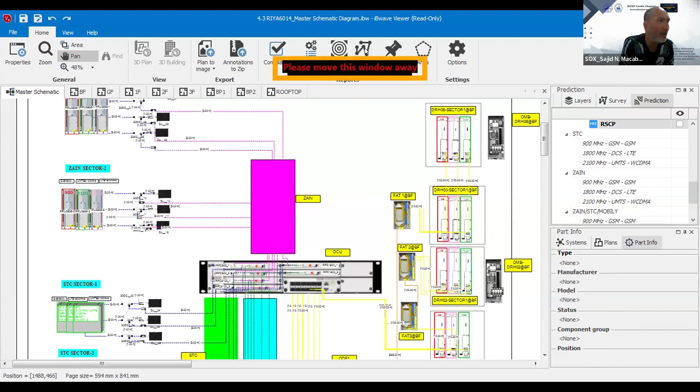Mamaya na po, may nag-message sa akin, ICEP, ESC, si Sofia. Mamaya na lang yung question ha. Kita po sir yung share screen. Okay, thank you.

So now, ito yung sinasabi ko na master schematic. So these components nasa loob ng equipment room, most especially nasa rack, yung pinakita ko kahapon. So what I'm telling about the rack, nandito yung BBU, yung baseband unit, yung DCU, okay? Yung ibang components like the FAT.

Okay, so let me zoom a bit. Yung FAT, yung ODB, sorry, OMB, yung ODF, okay, yung optical distribution frame. So yan yung ginawa ko na design noon.

And etong dito kasi, ito yung kumbaga yung lead operator ito. Tapos yung iba, ito yung mga dummy load, kasi dito din mag-connect if ever na merong shared site yung sinasabi ko, pero hindi siya neutral hosting. Neutral hosting, meron nang naka-ready na another system integrator, naglagay sila ng neutral hosting pero wala pang operator sumaksak.

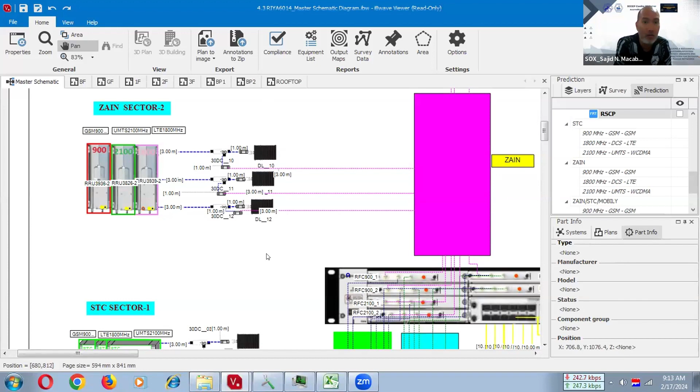Kaya nga neutral, pero etong shared site is similar to neutral hosting. Ang problema lang, yung lead operator, yung discuss ko last Saturday, yung naunang operator, siya naglagay ng infrastructure. Yung second at saka third, sasakay na lang sa system. Yun yung, kaya may dummy load dito.

Then siyempre, ito yung sinasabi ko nga na sa master schematic. This design is very required. Lahat ng i-discuss ko, required ito na document. So sa mga may alam ng IB Wave, you are very lucky. Sa mga wala pang alam kung anong IB Wave, ito yung itsura ng IB Wave. Okay, so ito, yan. Yung mga yellow, it corresponds to the fiber optic cable.

Yung diniscuss ko last Saturday, yung mga pigtails, yung mga ready-made na patch cords, depending on how much the distance, depende yan because part sa survey yan, dito ilalagay, tapos yung susunod na connection, yung DRH at saka RRU. Sir, saan yung RRU? So yung DRH or RRU, ito yun.

So ibig sabihin, dadaan mo na sila lahat sa optical distribution frame because the connector is this connector going to the other end of the fiber optic patch cord, it's another connector. So madalas ginagamit namin dito, gumagamit kami ng STP, gumagamit kami ng FC type connector, and the other end would be the LC type connector. So kailangan ng ODF para may interface.

So from ODF naman, going to the DRH, dadaan mo na siya sa FAT or yung fiber access terminal kasi iba na naman yung connector. Ganun talaga yun, mix and match talaga. Hindi naman pwede universal lahat, all the way pare-parehas ng connector. It's a business talaga, so ibang vendor or telecommunications hardware or equipment manufacturer, iba yung connector. So walang problema, nandiyan naman yung mga connectors diyan, mga standard connectors na basta mag-fit. So yun yung gagamitin nyo.

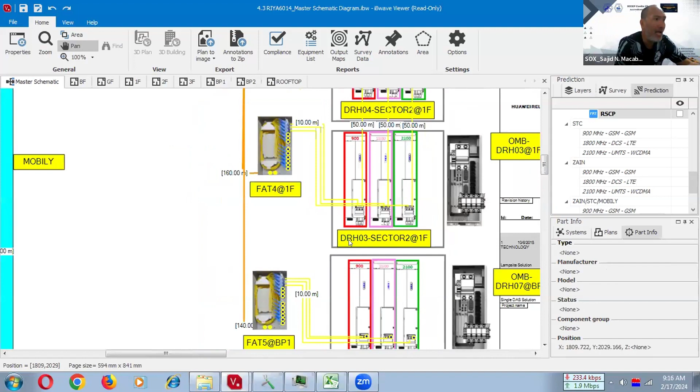Now sir, dahil itong DRH is part of the active part or yung master, kaya naman mag-umpisa yung passive na part. So mag-umpisa yung passive na part, either DRH na or RRU, yung remote radio unit, yung sinabi ko last time. Okay, so ito yun. Ito yung ano naman, yung sa passive na part, which is yung DAS schematic.

Okay, halimbawa ito, DRH siya. So ibig sabihin, hindi dito sa design na project na ako yung nag-design, DRH going to the distribution na. Distribution, ibig sabihin, nakikita nyo ito? Nakikita nyo guys, ito mga antena to.

May mga antenna, yung high gain antenna, meron normal na omnidirectional, meron panel. So eto 'yon. Sabihin natin papasok na tayo sa passive. So ito na 'yon sa passive na part, sa DAS schematic, sa distribution.

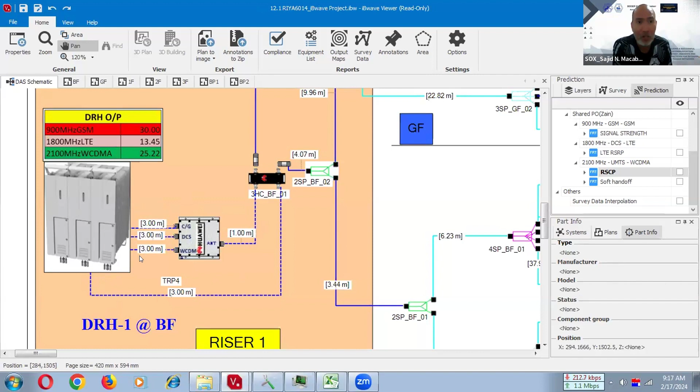So DRH, siyempre, diniscuss natin sa Philippine Electronics Code sa Module 1. Ano to? This is the triplexer, tatlong technologies. Tapos, siyempre, question, kung ito yung triplexer, which is tatlo, 2G, 3G, 4G, bakit meron isang kable dito? Itong isang kable kasi, this is another connection pag meron tayong ginagamit na MIMO antenna.

Kasi di ba pinakita ko sa Module 1, nasa loob ng Philippine Electronics Code Book 4 natin, pag gagamit tayo ng MIMO antenna, there will be a second input. Kaya nga dalawa yung jumper cable ng MIMO antenna. So yung pangalawang jumper cable, yung pangalawang port, galing dito. Itong tinuturo ko ngayon, galing dito para i-connect na yung second port ng MIMO kasi meron tayong nilagay na MIMO antenna as per our design. O ikaw yung designer, so syempre, second cable for the second port sa mga MIMO antennas somewhere sa design natin, somewhere in the building or somewhere in the floor.

So ito yon. Then dadaan siya sa yung pinakita ko sa Module 1 na yung 2x2, 2 input, 2 output na hybrid combiner. Hybrid combiner, ibig sabihin, meron siyang gain para makompensate yung mga losses. So ang daming losses, ipapakita ko sa inyo kung anong klaseng loss yan.

May table generated from the software. Nilagay ko na sa Excel para hindi mabigat mag-load kasi mabigat ang kinakain yung memory nitong software na ito. So para makompensate, itong combiner, itong triplexer, may mga gain yan. Nasa specs na yan, nasa technical specifications na yan, para makompensate yung ibang mga losses.

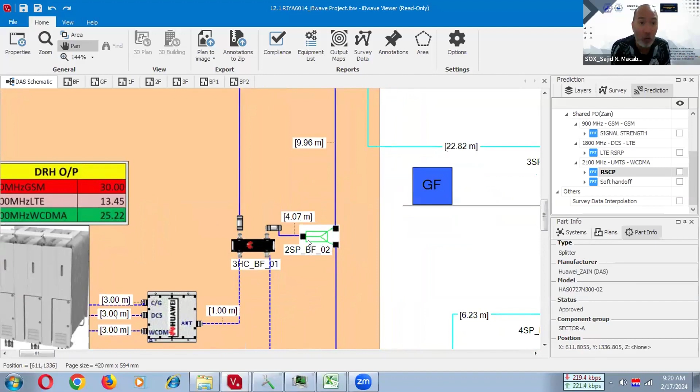Okay. So now, sir, ipakita mo nga sir yung design mo sir para magkaroon kami ng idea kung ano yung diskarte mo. By the way guys, sa design walang mali, walang tama. Pero ang comment sa iyo yung consultant. Wala kang magawa. Kahit na magaling ka, kahit na mas magaling ka sa consultant, masusunod pa rin ang consultant pag meron siya nakitang something wrong, or tutulungan ka naman. Okay? Because this is a team collaboration.

So, for example, sa basement floor, meron akong dinesign kasi sa basement floor, may mga offices doon, mga security, dito sa itong dinesign ko na specific na project. So, yun, nakita ko, may mga rooms, may mga CCTV room, security guard, may mezzanine sila doon. So nag-design ako, gamit ako ng two-way splitter, tapos distribute ko, nagamit ako ng four-way splitter, gumamit ako ng 3SP, and then ito yung mga number of antennas, lahat omnidirectional, SISO, hindi ito MIMO, na makaka-cover niya lahat ng basement floor.

Sir, paano namin malaman itong mga antena saan mo nilagay sa floor plan? Ipapakita ko ngayon. So ganito yung diskarte sa pag-design.

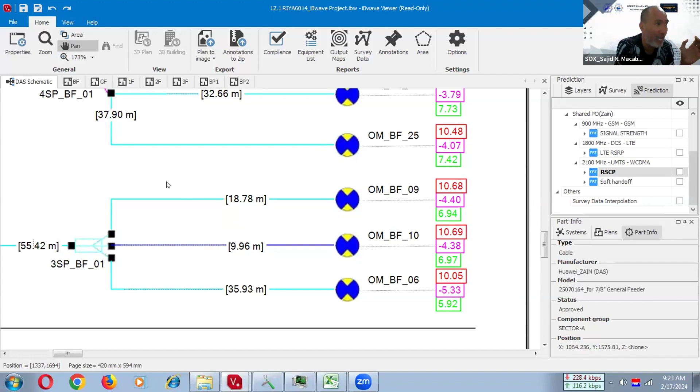kopya nung telecom operator namin, ito yung template, ito yung standard nila, sundin natin. Pag meron isa dyan, halimbawa yung tatlong values, yung dalawa okay, yung isa bagsak, you need to check the configuration of the hardware, baka mali lang yung pag-configure mo. Sir, anong configuration yun? Minsan, i-check mo yung configuration ng DRH. Pag wala dito yung problema, balik ka sa mga kable. Yan yung best practice. I-check mo yung jumper cable, baka faulty, or baka yung antenna faulty. I-replace mo yan, ipa-replace mo yan. Halimbawa, ikaw yung site engineer, i-replace mo yan.

Kasi gusto ng design engineer na yung values na lalabas dyan, almost similar. Okay, by the way guys, yung design at saka yung implementation, it will never be 100% the same. Pero all changes yan.

Kaya nga yung design engineer, pag nag-uumpisa na sila mag-install, dapat ang site engineer kukuha ng kopya ng design doon sa design engineer talaga. Kasi yun yung reference niya eh. Ano ba yung dadalhin ni site engineer? Syempre, yung design, approved design na ginawa ninyo in the software. So, ito mga best practice.

Okay? Pag wala namang problema dito sa passive na side, ang problema, i-check nyo sa susunod, yung mga fiber optic connections dito, baka may problema sa splicing nyo or baka merong factory defect yung mga pigtails, yung mga patch cords na ginamit niyo from DRH to FAT, FAT to ODF, ODF to OMB, ODF to DCU. Yun, i-check nyo yan, paatras, kumbaga.

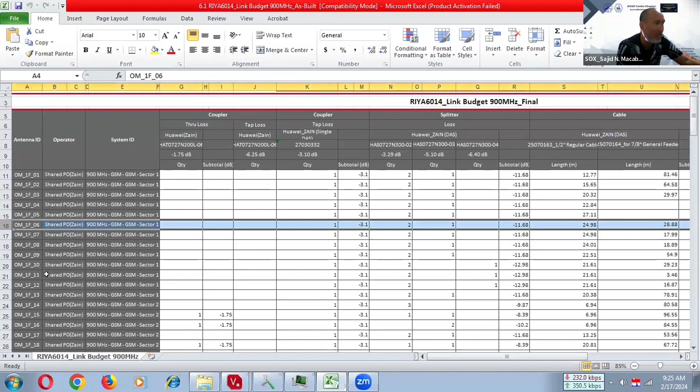So, yan yung parang, now, sir, may sinabi ka, saan yung link budget sinasabi ko? So, ito yung example ng link budget. I hope nakikita nyo. Saan yung example natin kanina, si basement floor? Let me OM BF 06. Ito naman yung example natin kanina, di ba? So let's find, saan siya? Ito. Ito yon. Okay, so now, ito yung antenna 6 na ginawa nating example.

So nakita nyo, ang daming losses. Coupler loss, through loss, tap loss, tapos splitter loss, cable loss, tapos sa bandang huli, yun na yung parang pinaka-gain niya. Okay, so just imagine, maraming mga losses yan, tapos pinag-aralan pa natin yan sa college. Okay, so syempre, ito yung example, ito yung mga losses niya.

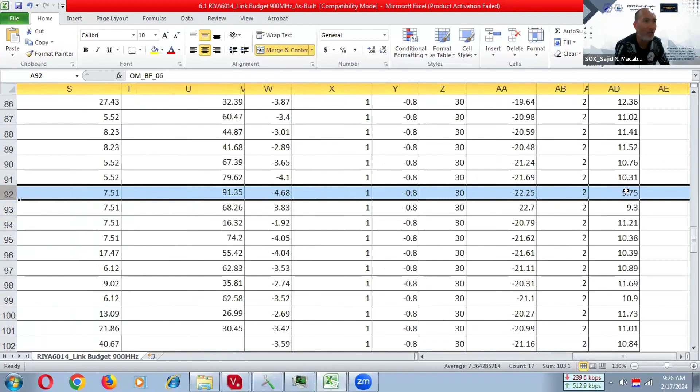Yan, calculated na ito ng software, and then in the end, ito yung, ano to, 9.75. Yan yung pinaka antenna EIRP. Sir, yan ba yung power, signal power? Yes, ang EIRP, that is the resulting signal power for 2G. Bakit 2G? Ito yung report 900 megahertz, which is 2G frequency yan, kay GSM 900. Yan, so that is the example kumbaga.

Now, let's go back to the other discussion natin kanina. Okay, salitan. So, meron ka ng design, master schematic, meron ka ng DAS schematic. Ano naman yung susunod, sir? We need the design proposal report.

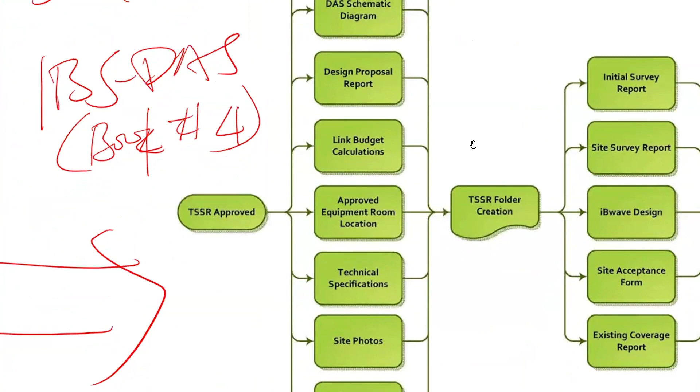So ito, salitan na naman. Link budget, meron na tayo. Master schematic, DAS schematic, meron. Design proposal report, pwede ko ipakita mamaya. So, design report, actually, narrative yan. Merong ibibigay naman na template yung telecom operator, copy-paste nyo lang. So madali lang yan. Actually, Microsoft Word yung design proposal report, narrative, very simple.

So sunod, approve equipment room location. Now, ito yung discuss natin last Saturday, yung pinakita ko kung ano yung magiging approve equipment room, and you need to put it in AutoCAD. Walang ibang software. AutoCAD, tapos i-PDF mo yan. Okay? AutoCAD talagang gagamitin. Hindi SketchUp, hindi Revit. AutoCAD lang, okay na. Yung pinakita ko last Saturday, ganun po yun.

Yung design using the AutoCAD software, and you need to reflect kung ano yung mga proposals mo. Gaya ng tinuro ko sa inyo last Saturday regarding sa drawing at saka yung mga required na view. Cross-sectional view, top view, front view. Para makita lahat yung mga equipment na sinabi ko from the PPS, from the AC to DC rectifier, those panels just like the main distribution board panel, the building alarm and building alarm terminal block panel, the tower alarm box, yung ibang panel pa sa smoke alarm, sa sprinkler system, sa inyong miniature circuit breakers.

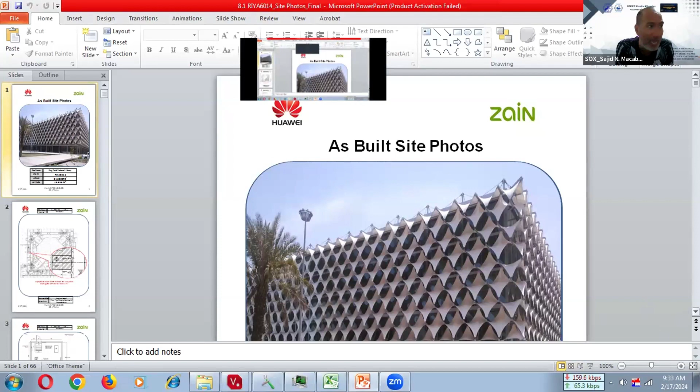Yung facade niya may mga design, makikita nyo sa picture. Pero ang malaking challenge na na-experience ko dito, ang outer walls niya puro glass. So kailangan nag-design ako na yung signal dapat hindi sumobra papunta sa labas, or else marireject yung design ko. Dapat yung signal hindi masyadong malakas papunta sa labas pero malakas siya concentrated sa loob, kasi lahat ng outer walls nito puro glass window.

So grabe yung design namin. Kahit din ako sa design team. So ito yon, National Library. Ito yung parang template. I'm just showing you guys para magkaroon kayo ng idea na ito yung template namin doon overseas noon.

So ito final photo, ito equipment room as per plan. Tapos sunod, ito yon yung sa loob ng equipment room. Rectifier rack, okay, mga photos ngayon, ito mga final to. At saka ipakita ko yung sa antenna na side.

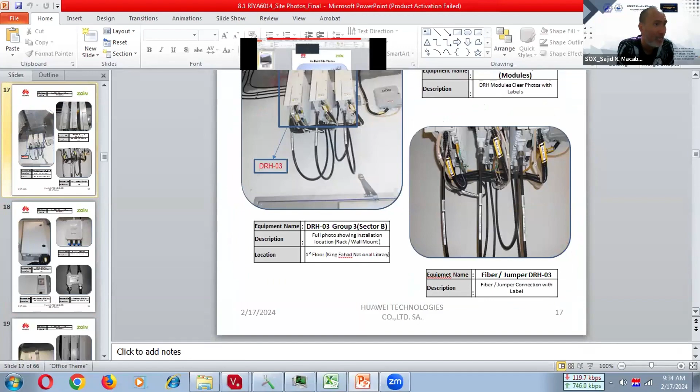Halimbawa dito sa Pilipinas, syempre hindi naman parehas nito. Pero meron na kayong idea na malamang sa malamang, dito sa Philippines, itong mga telecom operators meron silang sariling template. So just follow the template that is given to you by your client. Ganito yung aming ginawa.

So na sa site photos, yung floor location, so sa AutoCAD din ito. Then ito, power survey. Kaya sinabi ko sa inyo last Saturday, pag nag-conduct kayo ng technical site survey, pag nalaman ninyo na wala ng spare breaker, which is more than 60 amperes na breaker na malaki,

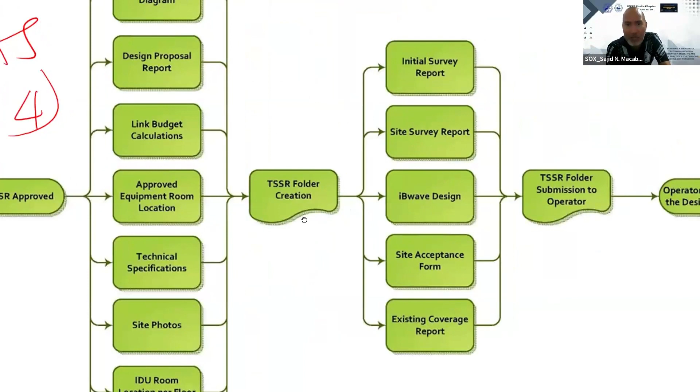So kung kompleto na ito, may folder ka na. Akala ko saan tapos na, ba't meron pa? Because this part, guys, sa center, itong nasa cursor ko, initial survey report, site survey report, iBwave design, site acceptance form. Ito yung nakompleto na natin dito sa left side, yan na yun yung documents. Pero ang kulang is yung existing coverage report.

Ito yung sinasabi ko last Saturday, preliminary walk test, or ang tawag namin preliminary penetration test. Ibig sabihin, you need to conduct a walk test or penetration test kung ano yung mga existing signals. Wala pa tayong system na in-install natin yung sarili nating system, but we need to know ano yung mga signals around the building, mga existing, so that we can document it. Napakita ko yung isang example namin kung ano yung ginagawa namin sa tinatawag na existing coverage report na yan.

Okay, so for a while, I will be sharing that existing coverage report. Kasi napaka-importante itong process sa indoor. At least you will know na itong proseso na ito talaga yung magiging trabaho nyo. Hindi ito nakikita sa textbook, hindi ito nakikita sa Philippine Electronics Code Book 4 or even Book 1. Yung Philippine Electronics Code Book 1, hindi ito na-mention.

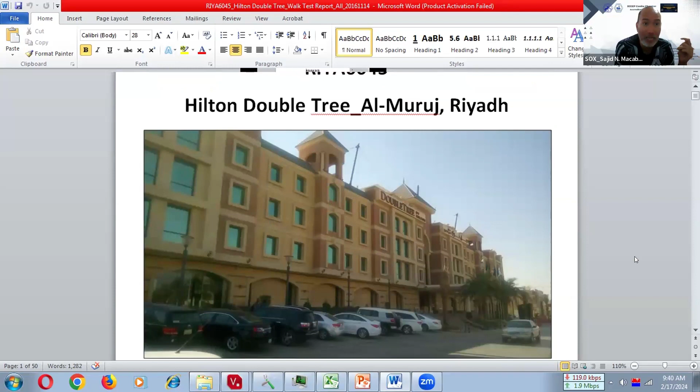This is Hilton Doubletree. Hilton is a big hotel industry owner. For the existing coverage report, you need to use certain tools, separate tools, not the design tools, but for drive testing.

This is the color legend. For IBS, we look at 2G, 3G, 4G metrics. For existing coverage report, there's no system yet, but we need to know the signal. If all floors have strong signal, we can conclude it's not necessary to install there, because the signal from the outdoor network is already strong.

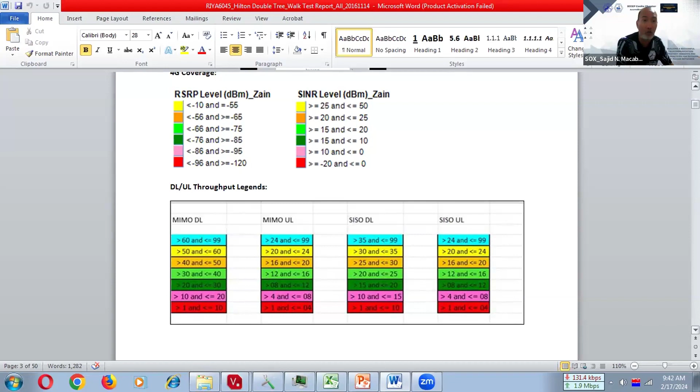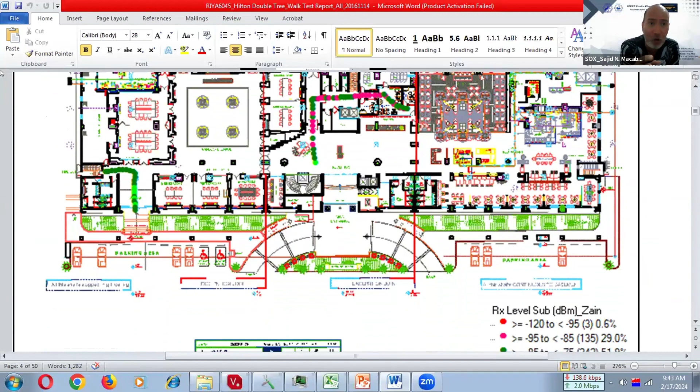For example, this is the ground floor. Why is it different here? Why are the signals choppy? It means there's a lot of ping-pong effect there, meaning many different signals from different cell towers. So it's not stable, a bad signal, bad location on the ground floor, that's why the signal is choppy.

So that's our sample existing coverage report. You will see the values - some parts are okay on the left side, also in the center part near the elevator lobby, and at the main reception since this is the ground floor, the main reception of the hotel has signal but it's choppy. The rest of the corridors and hallways have no signal.

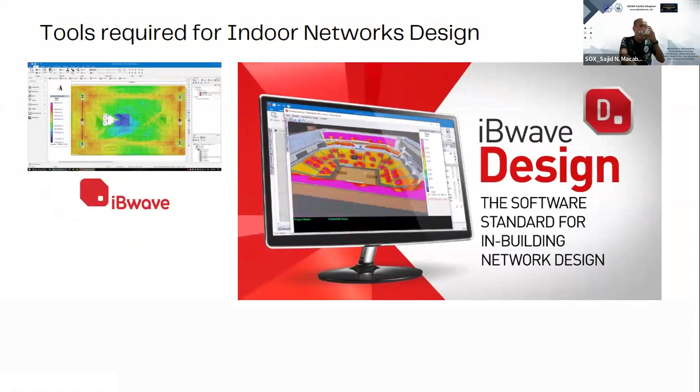Are you deploying wireless in-building DAS, small cells, Wi-Fi, or public safety networks for voice and data services? Designing simple networks or complex heterogeneous networks? If so, you're probably facing challenges that slow you down.

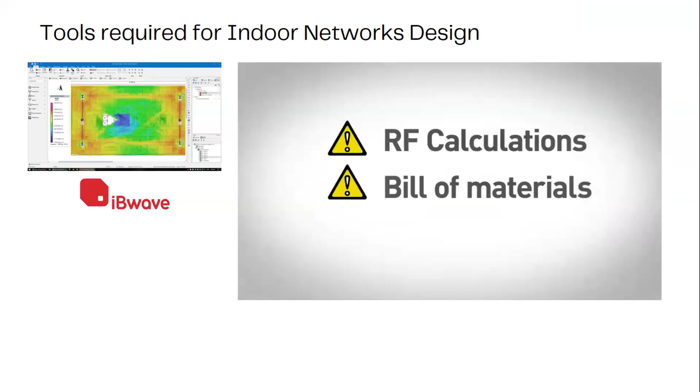As wireless technology becomes increasingly complex, you need a standardized platform that will not leave you dealing with inconsistent information and struggling to create optimal, reliable designs. Too much of your work is manual and repetitive because the tools you work with are not integrated, and can directly lead to errors in your RF calculations, bill of materials, and project costs. You may also receive designs from contractors in multiple formats, which make them hard to review and even harder to ensure compliancy with your performance criteria. This is the real cost of your deployment.

Do you want to spend more of your time designing and less of your time sorting through information while struggling to keep up with the sheer volume of work piling up on your desk? What if there was a far more efficient and less painful way to design and deploy high-performance indoor wireless networks?

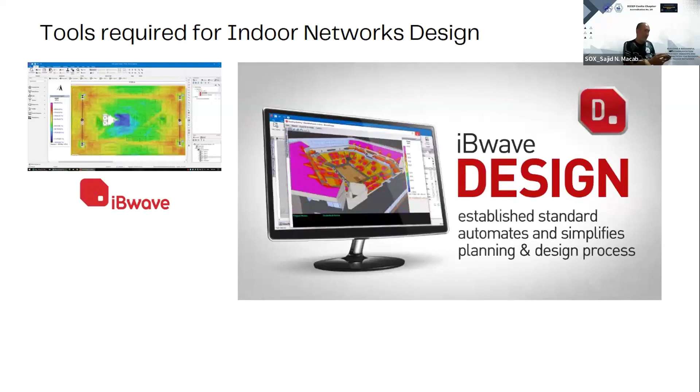iBwave Design, the industry's established standard, is a software that automates and simplifies the planning and design process, letting you focus on delivering the very best multi-technology in-building wireless networks. From documentation to planning and design, all the way to implementation and maintenance, iBwave Design provides you with a standardized framework to create high-performance wireless in-building projects. Its rich feature set includes easy validation of RF performance and lets you quickly evaluate costs, ensuring your project runs smoothly, all in a single application.

Design your in-building network for voice and data applications that comply with your key performance indicators. iBwave Design supports worldwide frequency bands for 2G, 3G, 4G, Wi-Fi, and public safety networks, moving through either active DAS, passive DAS, coax, or fiber. Deliver performance that will impress and retain subscribers.

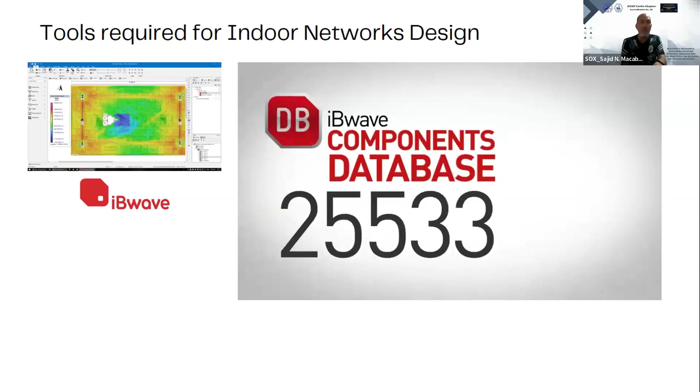Design your networks by selecting the components you need from our ever-growing database of accurately modeled network elements, featuring the manufacturer's specifications for the most accurate calculations. You can also generate an automatic bill of materials and keep your project's budget under control. With complete information on equipment costs, timelines, and performance, you can deploy your in-building wireless network without any surprises.

iBwave Design reduces your project costs by troubleshooting your network before it's deployed, using the automated error checking functionality. This identifies failures and eliminates problems early in the design process, which can significantly reduce any site visits post-installation.

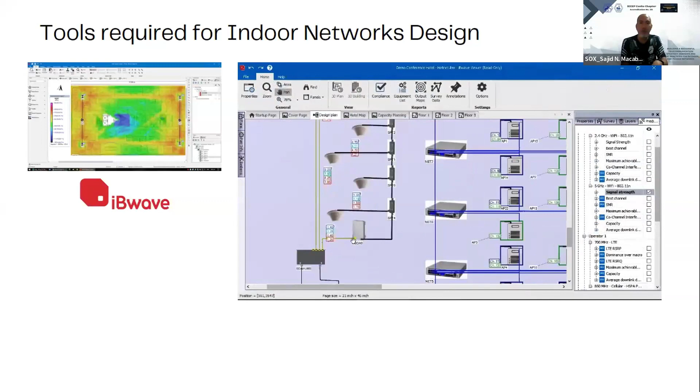The application lets you interconnect components, automate RF calculations, and simulate your network's performance on 3D floor plans using the most advanced prediction capabilities for data and voice. It also lets you optimize hardware for maximum performance and cost efficiency.

You'll be impressed by how much time iBwave Design saves you. What used to require weeks of design work can now be completed in only a few hours. Make the right choice and adopt the industry standard now to benefit from significant productivity gains in the future.

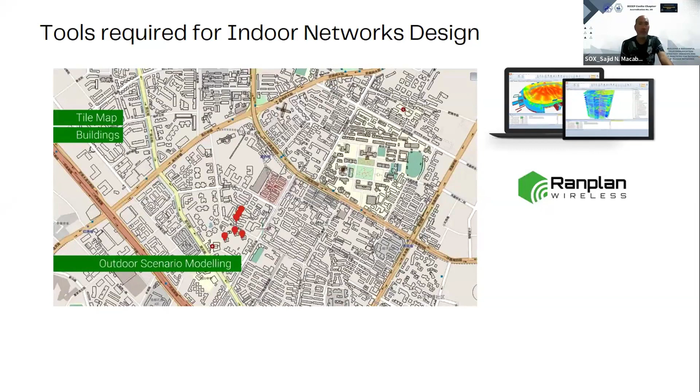Yan, yung sa outdoor naman siya. Pwede sa outdoor, pwede indoor. Cell power. Yan. So, may idea na kayo kung ano yung mga software tools, guys. Yan, network planning yan, using Ranplan. Pwede sa indoor, pwede sa outdoor.

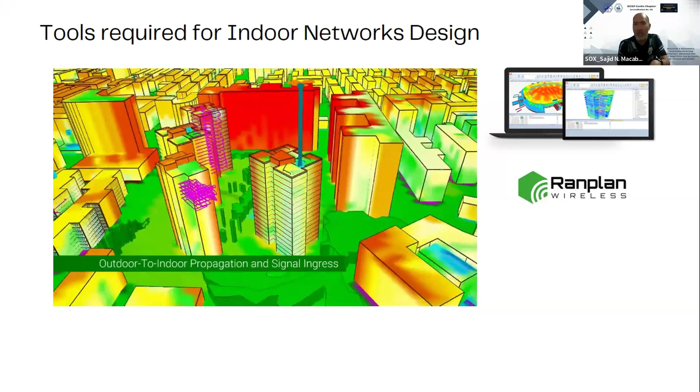Yan, so sino ba yung pwedeng gumamit nito? Tayo lang, mga electronics engineers, guys. Tayo lang ang professional na gumagamit itong software tool. Okay?

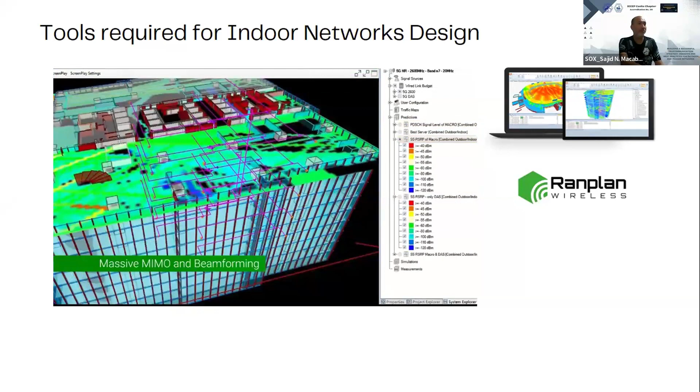Atin ito. Yan, antenna orientation. Ibitan nyo. Very efficient, maganda yung design. You can optimize your design using the software tool, guys. It will improve efficiency and productivity.

Okay, yung last naman, pwede indoor, pwede outdoor. Sino yung last one? Ito. Let's watch this.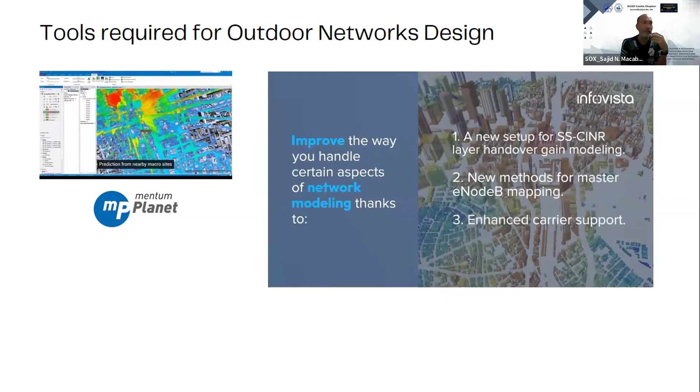Okay, si Mentum Planet naman. Yan yung mga network planning. So, kita nyo yung tatlong sector natin sa outdoor. Yan, yung mga network, yan, pangapat.

Okay, so yan yung mga tools. So now, let's go back sa yung sa outdoor. Ito naman yung ating discussion. Balik tayo sa design process. So design process, we already discussed that one using the flowchart para makita nyo yung talagang ano ba yung ginagawa namin. So now, let's go to narrative.

For indoor network, syempre, DAS yan, or yung isa sa mga solutions is yung DAS, one of the many in-building solutions. So sa DAS, we know that we need to strategically, as stated in our book number 4, place the antennas on specialized locations or strategic locations to increase reliability. That is one of the many KPIs na discuss natin last Saturday. Para makuha natin yung better signal, that's one. Aesthetic benefits, pwede rin. Pwede itago natin, the signal will still be there.

May losses ba, sir, pag nakatago yung sa loob ng ceiling? Ang sinabi ko last Saturday, very minimal. Very minimal. Mako-compensate yan sa mga gains later on. So, yun. Next, to maximize the RF performance, kaya distribute natin.

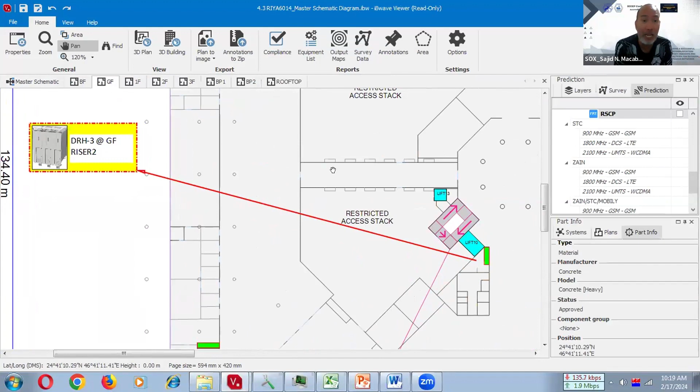Saan nanggaling siya? Sa basement floor kasi nandun yung telecommunications room natin. So balik tayo sa basement floor. So nandito yung cable routing. So nakikita nyo, kulay yellow, cable routing. Tapos ito siya, nandyan yung riser, floor to floor, vertical. So saan yung telecom room, sir? Nandito yung telecom room, dito lahat nanggaling. Kaya yung cable routing, nakakulay yellow.

Yan, tapos yung DRH location, dito namin nilagay. Tapos may kulay yellow-green, it symbolizes the riser from floor to floor. Dumadaan din dyan yung coaxial cable, yung fiber natin na more than 100 meters, kailangan ng splicing. Yung iba naman mga less than 100 meters, may mga patch cord naman available. So yan yung fiber routing na sinasabi.

Okay, tapos yung coverage commitment, which is part of doon sa pinakita ko sa design package na parang checklist. Yan, checklist, ito yung coverage compliance. Yan, let's see if compliant yung ating yan, okay? Sorry. Output muna daw. Okay, this one, output. Okay, compliance. Yan, so we will see, si software na magsabi. Okay, so maraming hindi compliant.

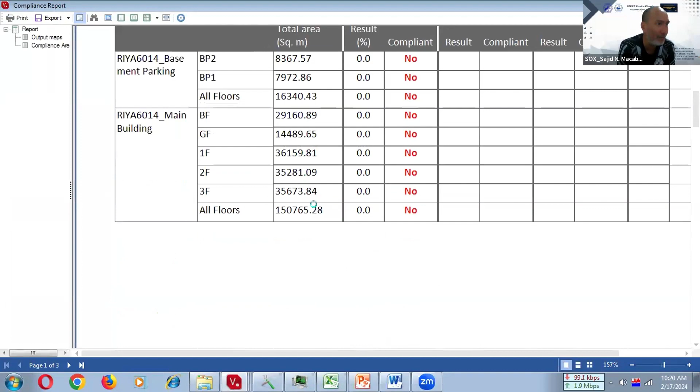Pero approve ito na design, sir. Ano? Sabi mo sir, kung less than 95% compliant, ibig sabihin less than 95% lang ang na-cover mo sa buong building, bagsak na yan. No, because when I did this design, may mga justifications ako. Sinabi ko na mayroong areas na restricted. Pag restricted yung area, chances are wala antennas na ilalagay doon. So nagbigay ako ng justification letter galing sa building administrator, building management, building owner na sir, maraming areas, sabihin natin more than 5% of the remaining 100% hindi kami magiging compliant because why? Ganito, ganyan. Sabi ng owner.

So approve. So pag nag-design na kami sa IBWave, tapos ang sinabi ni IBWave na-detect niya na less than 95% compliant, hindi naman stricto dito yung operator. Basta importante may justification ka na hindi lahat ng floors or hindi entire building ay nilagyan natin ng antena kasi merong iba, sabi ng building owner, wag lagyan ng antena. So this is just for documentation purpose. Pero at least meron tayong justification. Pero kung walang justification, rejected yung design. Dapat more than 95% para ang lalabas magiging yes siya. O ito yun target, 95%. Okay, na-gets nyo ha? Okay.

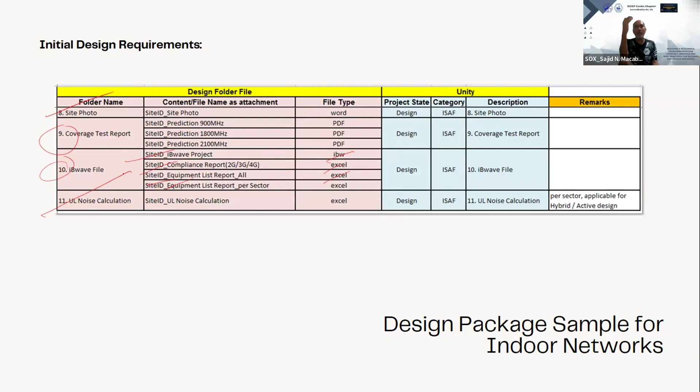Okay. Now next, kung may initial, may final. Pag may final, halos parehas yung checklist pero marami na. Ang pinagkaiba lang is final lahat. Paano mo nagsabi na final? Ito, puro F, F, F, F, puro final yan. But this time, marami. 1, 2, 3, 4, 5, 6, 7, 8, 9, 10, 11, 12, 13, 14.

Sir, merong dinagdag dyan? Meron. Saan yung dinagdag na importante? Ito yun, sweep test report. Ano yung sweep test report, sir?

Ito yung mga cables. Siyempre, maniningil tayo ng presyo with 10% margin profit para sa pagiging kontraktor, tapos yung cable mo, pangit, tinest pangit, i-reject yan, patatanggalin yan. So how can we know na yung install natin, walang factory defect, top quality, highest quality?

Paano natin malaman? We need a software tool, then I will show you right now.

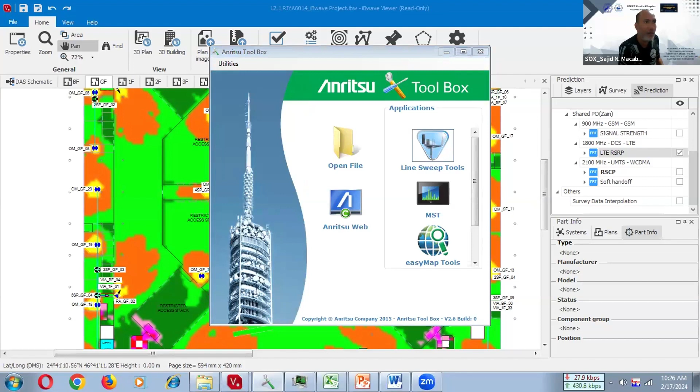Okay, I'll give you one example. Yan, so yan yung halimbawa, nakapag-testing ka na using the software tool. So you need to save the log files or the data logs, and then we will open one example para ma-visualize ninyo paano ba tinetest. Ano ba yung testing equipment? Ano yung itsura ng reading?

Okay, so now ano yung example natin? Yung OM underscore BF o basement floor underscore antenna number 6. So hanapin natin si basement floor. Basement floor, ito yun.

So, BL saan si 06? Oh, yan, 06, yan sila, di ba? Yan yung mga 06. Now sir, paano ko malaman na antenna yan?

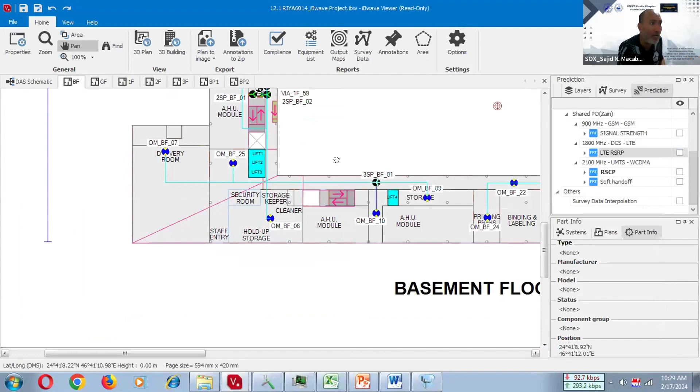Sir, paano natin malaman na tama yan? Balik tayo sa drawing, balik tayo sa design, and it is located here. Let's go to basement floor. So let's find the OM underscore BF underscore 06 sa floor plan. Okay, fine, nandito siya. Ito, tinuro na, dito siya sa may kwarto ng security room. Yan yung example natin kanina.

So now ano yung connection niya? Kasi sabi sa Anritsu na-detect niya itong antenna OMBF06 connected sa isang splitter. So titingnan natin sa floor plan, tapos sa schematic. So andito siya. Now dahil alam natin na dito, balik tayo sa schematic and we will find basement floor 06 connected to three-way splitter. So tama, 3SP BF01, di ba? Yan, BF01. Now let's open yung reading niya na voltage standing wave ratio.

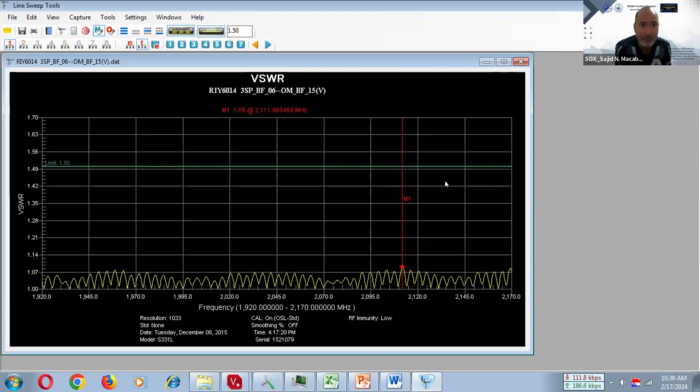Let's open so that you will know, guys, ano ba yung itsura pag nire-reading. Sa mga hindi pa nakakagamit ng Site Master, Anritsu, o yung cable and antenna analyzer test equipment, ganito yung itsura. Sir, may tanong, ano yung 1.50? Ano yung M1? M1 is the mark, first mark.

Merong ibang telecom operators na kailangan merong mark. Ibig sabihin, yung maximum at saka yung minimum mark ng isang signal. Sino ang naglagay nitong red line, sir? Automatic po yan sa test equipment. So ibig sabihin, yung voltage standing wave ratio dito is not higher than the limit. Sino yung nag-set ng limit?

It's the telecom operator because it is part of the minimum standard requirement. Pag lumagpas sa 1.5 yung reading, itong signal traversing the cable, there's something wrong with your cable. Either your cable is faulty, or yung connector pangit, faulty, o baka yung technician na gumawa ng cable segment, malbog. Or pangatlo, posible na yung three-way splitter is faulty kasi nandun yung source side, dun sa side ng splitter. So maraming troubleshooting, guys.

Okay, naintindihan nyo? Okay, so that's it. Now, let's share ulit.

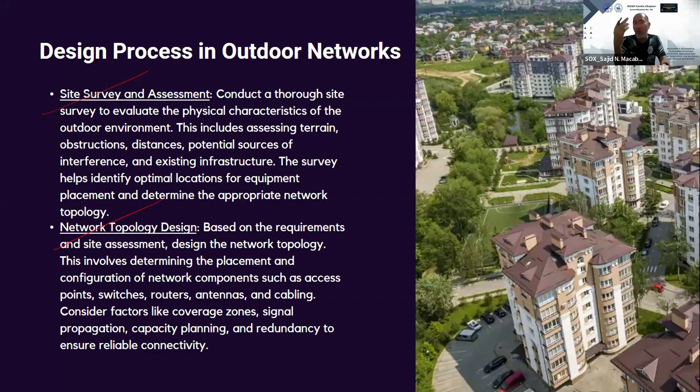But is there a topology in network planning for outdoor networks, for Wi-Fi and especially for cellular standard? The answer is yes. The answer is yes. That's why we plan, because we need to make sure our topology is efficient enough so it's not redundant, because like I said, we're talking about millions, so your planning, your layout of cell towers, outdoor DAS, or Wi-Fi, it should be strategically placed. There's a strategic location too. The difference is, it's outside. So what do you place outside? One example is the outdoor cell tower, right?

Okay, equipment selection, that's also discussed. Both cellular and non-cellular standard, the process is almost the same for outdoor. RF planning, yes, very important. You need to plan which sector is facing where, what electrical tilt, mechanical tilt, what frequency to be used, how much power the BTS will consume going to our sector antennas, and of course we need to optimize.

Optimization is a long-term job. It's also maintenance work, optimization. You will do benchmarking, you will do single site verification, you will do clustering, live testing. Okay, security access, of course. We need security to safeguard the cell tower, for example.

Next is the power connectivity planning. I already said this is also applicable to indoor. If you know there's no power indoor, you stop. But the difference with outdoor is, if there's no power, you can use a generator, you can use solar. Next, deployment and installation. What will you deploy? What kind of BTS? Is it compact or outdoor type, waterproof? What do we need to install? The survey report says generator, even if there's already a generator, even if there's already electricity. Why is that? Because of this and that.

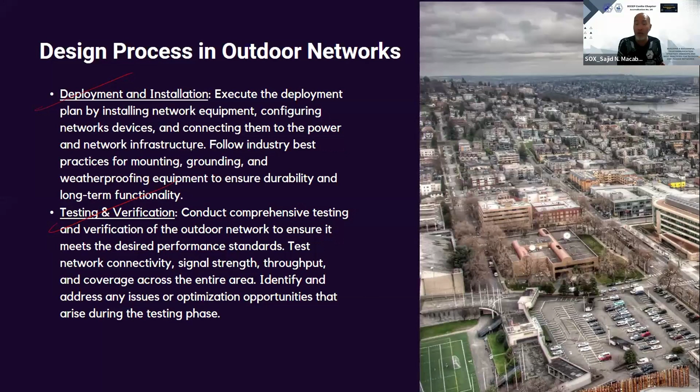Okay, next, testing and verification. This one, but in software. So again, I'm reminding you, you are going to test and verify it in the software because we haven't installed anything yet. We are still in the design stage. Okay, then of course, ongoing monitoring and maintenance, yes. That means, even after design is done, after installation, after it's running, you still need ongoing monitoring and maintenance.

Of course, right? So again, a keyword: crucial, to consider scalability, future expansion. So almost nothing is different. It is very much relevant, related, same for indoor and outdoor. Only the scenario is different, only the environment is different, okay, and the approach. Why like this? Why do you need a solar generator? Why do you need a dual generator? Why more than 1,000 imperial gallons for the fuel tank? Why have both generator and solar panel on one site? There's a purpose for that. There's a purpose for that.

Sectorization in indoors. So just like outdoor has sectorization, indoor has it too. I discussed this last Saturday and I will discuss it again because it is important - in indoor networks, especially in-building solutions, it's not all the time that a single baseband unit can handle such a large area. So what you will do is add more, another baseband unit, so that you can create another sector.

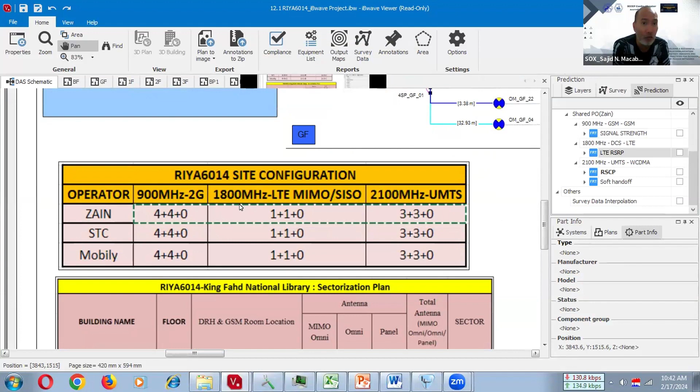So in the design I made, here's our example from earlier. That's part of the design. This design is a shared site, with the lead operator on top. This is our configuration. We used MIMO and SISO because some locations in the entire building have large traffic - not just foot traffic but data traffic. Many users are using services, so this is the sectorization we used.

So that means 2 sectors, we used 2 BBUs. When I say BBU, this is what I mean - this BBU. We used two of them, in quantity. So because we used two BBUs, we created two sectors - one sector per BBU, the other one another BBU.

And then the number of antennas, where the DRH is located, on which floor, and then the DRH going to the distribution. So that's the sectorization plan, clear now.

So why do we sectorize? Sectorization is applicable for outdoor, for indoor, even for Wi-Fi - outdoor Wi-Fi, indoor Wi-Fi, it's the same. Whoever you ask, you need to sectorize. Why? So that one piece of equipment isn't overloaded and has a focus area. As electronics engineers, we know that the more devices connected, the power use becomes higher - the higher the utilization rate of power, the power drops. That's what we watch out for, so that power is preserved and performance stays stable, especially when talking about RF performance. You should also watch the power utilization. That's why we sectorize - it's applicable to non-cellular and cellular standards, outdoor and indoor.

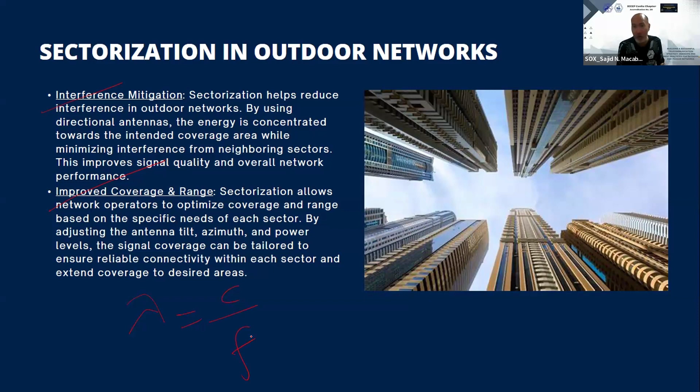Now let's go back to this. When it comes to range, don't forget the formula: the higher the frequency, the shorter the range; the lower the frequency, the longer the range. Of course, load balancing also applies to outdoor networks, and enhanced network planning.

Support for advanced technology is of course supported because what are we using now? 5G, right? Then this year, Wi-Fi 7 will be released. After 6 years, 6G will be released. So what I'm saying is, it is also scalable.

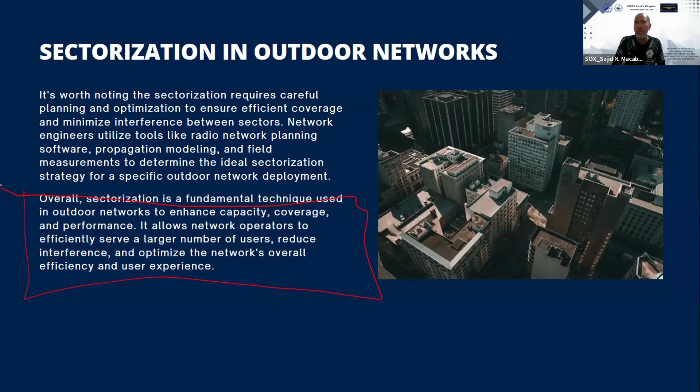Overall, sectorization is a fundamental technique in outdoor networks, also indoor networks, so that it allows the network operators to efficiently serve a larger number of users. That's their target, because it's business.

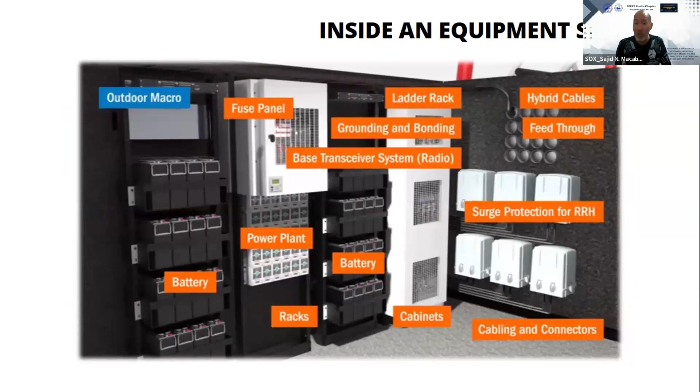You might be wondering, sir, what is an outdoor macro? That's the other name for a cell site. The other term is greenfield site. But the correct term worldwide, we call it a macro cell. That's what I call it, macro cell. Okay, so that's how it is. Macro cell, that's what it's called.

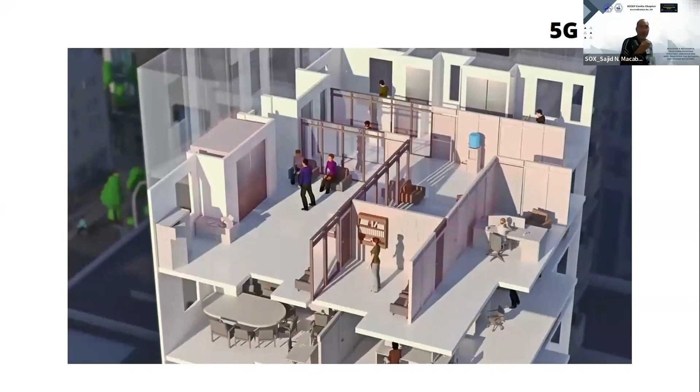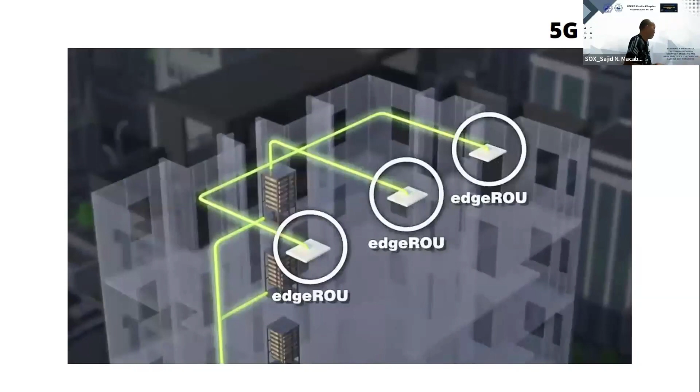It's no secret that mobile connectivity is essential in our personal and professional lives. Entering a building and losing mobile service is no longer acceptable. People have choices about where they shop, where they work, and where they play. That is why Solid is empowering businesses, employees, and customers everywhere to provide reliable in-building cellular service with Alliance 5G DAS. A DAS is a distributed antenna system. Unlike a cell tower where signals are transmitted from antennas in only one location, the DAS sends the radio signals to multiple antennas to extend coverage. Inside buildings, this is particularly valuable because obstacles such as walls, elevators, and equipment block signals. Here is how Fiber to the Edge DAS works in a typical building. Because the people in your building subscribe to different wireless service providers, the DAS accepts multiple radio inputs at a centralized head-end interface, usually located in an MDF or other room. The DAS head combines the signals at low power and converts them to light for distribution over fiber optic cables. From the head end, fiber optic cables carry the signals to IDF or smaller IT closets on each building floor. At the IDF room, the optical signals split for distribution to multiple antenna locations. The DAS remotes receive low-voltage electrical power via copper conductors pulled with the fiber optic cables. The DAS remote converts fiber optic signals back into radio frequencies and then amplifies the signals. The DAS remote may have integrated antennas or external antenna ports. The Solid Alliance Edge ROU with integrated antennas features a low profile, great aesthetics, easy installation, and includes 4 cellular frequency bands. Using the same fiber optic infrastructure, add-on Edge ROUs double the system capacity, 8 frequency bands, providing an upgrade path that protects your investment. Always on, everywhere connectivity is the standard. Solid DAS provides dedicated edge connectivity for your business, its employees, and your customers. Solid's Edge ROU DAS installs as simply as Wi-Fi, but provides the mobility, convenience, and security of cellular communications. Make the switch to a distributed antenna system. Edge connectivity, solid coverage. Improving the tenant, guest, student, patient, and caregiver experience.

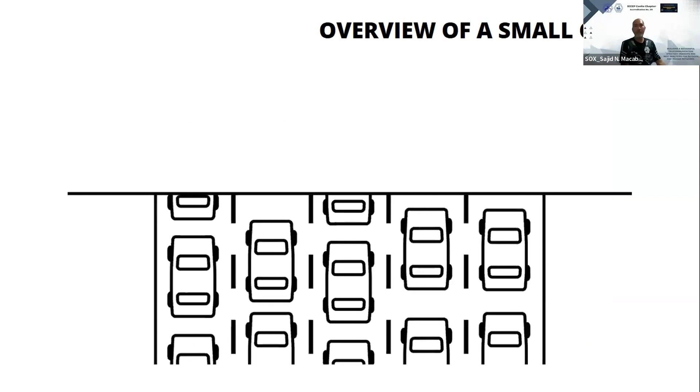There's a major need to grow wireless networks, even beyond the home, for things like public safety, connected schools, smart communities, the Internet of Things, and more. And we've got a small solution that can do it all. They're called small cells. These compact wireless devices extend wireless network coverage and increase network capacity where users need it most, like a high-traffic city street, a shopping center, popular tourist spots, and residential areas that need service in discrete ways. Think of a 5-lane freeway during rush hour. Putting small cells in your city is like adding several exits along the freeway, which frees up traffic to more quickly get to where it needs to go.

And the best part is, they're inconspicuous. Small cells attached to existing infrastructure in the public right-of-way, like streetlights, traffic signals, and utility posts. Or in some cases, new freestanding poles. Small cells help deliver the same network speed and reliability consumers expect from Verizon, all while blending into your city's landscape. Verizon has launched thousands of small cells in cities of all sizes, and it's making a big impact. These provide faster, more reliable connectivity to residents, tourists, business owners, and first responders. That's great for growth. Together, we can enable cities with a network built for the digital future. And there's nothing small about that.

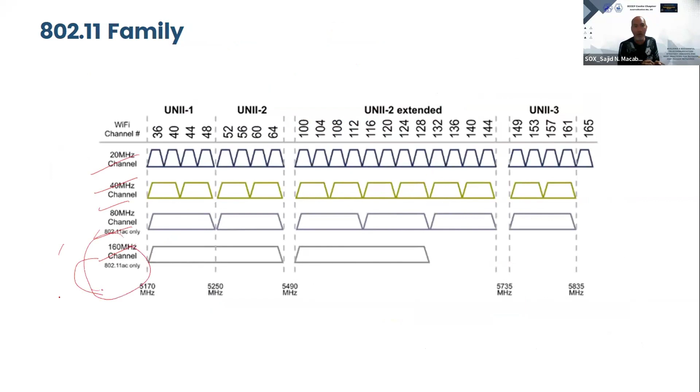Okay, of course, when talking about frequency bandwidth, the channels, this is it. So sir, where is Wi-Fi 6? Wi-Fi 6 also utilizes here, 5, also 6. Sir, how many frequencies does Wi-Fi 7 have? Frequency bandwidth, 320. That's strong.

So, konting review again. Yung wavelength, kaya nga napaka-importante na kailangan mong i-revisit yung formula ng wavelength. So yan yung behavior niya in terms of signal propagation.

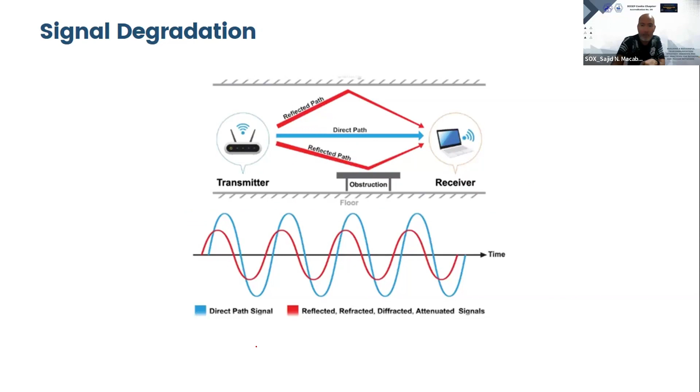Ito naman yung degradation. Siyempre, hindi maiwasan yung degradation because maraming obstacles inside the building, talking about Wi-Fi. And of course, attenuation. So every physical material may corresponding value, fixed value sa mga structural materials. So it can attenuate the signal. It can affect the behavior of the signal propagating side. And of course, ito yung isang example ng mga fixed value ng mga attenuators na ito.

And of course, interference sa 2.4. Grabe yung interferences talaga sa 2.4 because we have these baby monitors and microwaves. So most common sources, nearby Wi-Fi networks at iba pang wireless devices. So just a quick review sa mga types of interferences if we're talking about Wi-Fi.

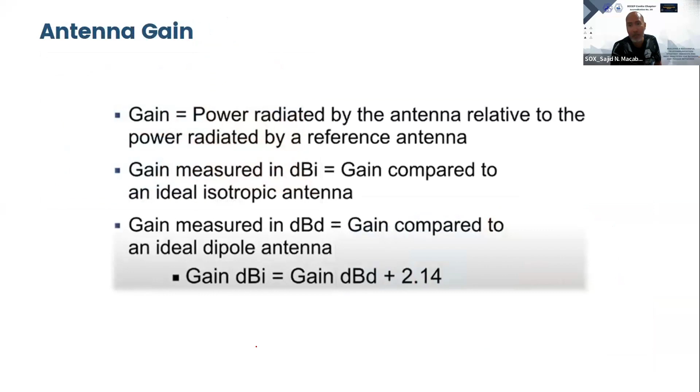There is co-channel interference and adjacent channel interference. So once you know this theory, you will have an idea kung ano yung dapat frequencies na gagamitin ko when I start making a design. Of course, for the antenna gain, ito yung formula na parating ginagamit pag nagka-calculate manually.

VSWR, there is also VSWR because we are also using cables, okay, and antennas. So yan, decode the specs, you need to read dahil sinabi ko, read specs. Of course, if you want a basic design 101, ito yung forma pag nag-design kayo.

So merong kung sa cellular standard, we call it frequency reuse. Pero dito naman sa Wi-Fi, just use the default non-overlapping channels. So pag ganito yung forma, wala kang interference na ACI. Okay, of course, merong criteria you want to design.

Ano ba yung target mo? Both coverage and capacity ba, or coverage lang? Pag coverage lang, konti lang yung quantity ng mga access points, for wireless routers plus gateway. O pag capacity naman, doon ka sa 5 GHz pero kagastos ka. So that is for you to decide as a designer and engineer.

Okay, of course, the design criteria, detail. So smaller cells, more radios, more bandwidth. That's correct. And of course, syempre, transmit power to control cell size.

So paano i-control, sir, yung cell size? You need to control the power. So how can we control the power? Aside from the bandwidth allocation, nasa wireless LAN controller yan. One good wireless LAN controller hardware is Cisco. Cisco Meraki naman yung kanyang dashboard, yung platform. So, of course, next design criteria, cell size and minimum mandatory data rates.

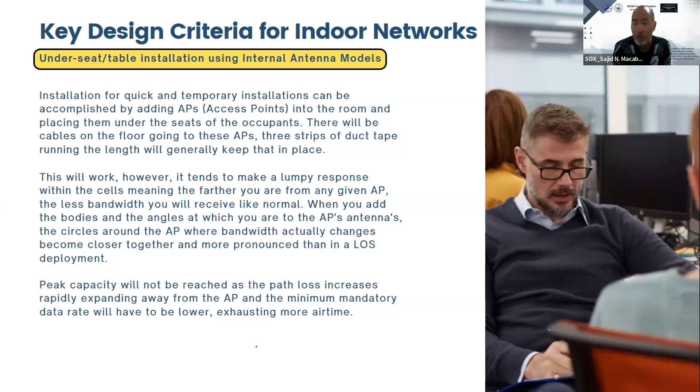Because of the ceiling height requirement, hindi siya ma-apply. Kaya nilalagay namin sa baba ng table, tapos hindi nakikita pero malakas pa rin yung signal. Nagtataka yung nagdala ng laptop na estudyante - ang lakas ng signal, wala ko nakikitang antenna dito, saan kaya nilagay? Ganito yun, pwede yun. It is also part of the design criteria, right?

Under the seat table, antenna selection yan. Pagbabasa kayo so that you will know what kind of antenna you need to use. Yan, ganyan. So ganito, pag mataas yung ceiling height, paano niyo i-maximize yung area? Halimbawa, ganitong example, auditorium - paano niyo makover lahat, o paano niyo pagandahin yung coverage? Depende sa inyo.

Kayo yung designer, okay? Walang tamang design. Mix and match, pero ang problema, lahat ay subject for approval. Diskarte ko, it is always subject for approval. Walang mali na design, iba-iba tayo ng diskarte. Kung na-reject sa inyo, sa akin in-approve, wala tayong magagawa. Ganun yun, it is always subject for approval, yung design ko or design nyo. And then again, it is one of the key design criteria.

Beam width, yes. Why beam width, sir? Bakit sinama? Because we don't know, baka yung project ninyo ay warehouse, at hindi applicable sa warehouses ang omnidirectional antenna. Puro directional yan. Front to back ratio, of course, you need to test that one. Ito yung key factors, 7 ang pinili ko, 7 key factors when designing.

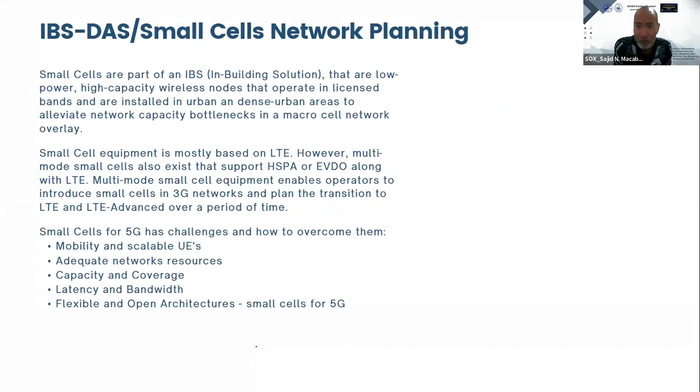Sir, ano yung pinaplano natin sa outdoor? Yung sinasabi mo na RF planning, network planning and design. So radio access network po yung napart, kaya ang tawag RAN. Sa IBS naman, I already showed and explained to you kanina.

Tapos ito, malapit na matapos. Merong isang bagong software ngayon, courtesy of iBwave, na kapag nag-design ka using IBWave, yung pinakita ko kanina, ikaw yung designer sa indoor networks. Tapos ibang contractor naman ang nag-design sa outdoor networks, pero nakakuha ka ng file copy, you can use this new software to bridge the gap. Ibig sabihin, kahit hindi ikaw ang nag-design doon sa labas, you can integrate it in this new software para ma-optimize mo pa ng maayos ang dalawang file. Maganda, no? You can optimize yung file na ginawa ng ibang contractor, ilalagay mo dito sa software mo, tapos ikaw yung nag-design dito sa indoor, you can optimize both of them simultaneously. Ganun kaganda ngayon, ito yung bago nila actually.

So why is it this good? To bridge the gap? Diretso na tayo, it's called iBwave Reach. Macro design, combine the indoor design using the iBwave Reach, then you can optimize both of them. Sir, bakit ma-optimize yung project ko sa labas kung nasa indoor ito? Because para makatulong din lalo na sa mga macro ingress na KPI na dapat mong bantayan, kasi merong analysis yung sa indoor na spillage dominance criteria. Ibig sabihin, yung signal sa labas galing sa outdoor dapat hindi malakas papunta sa loob. Also vice versa, it will work both ways - yung signal mo sa loob dapat hindi malakas papunta sa labas because it will also affect. Using this software, bago po ito, it will bridge the gap, optimal yung dalawa, balanced. So let's watch this video, patapos na tayo.

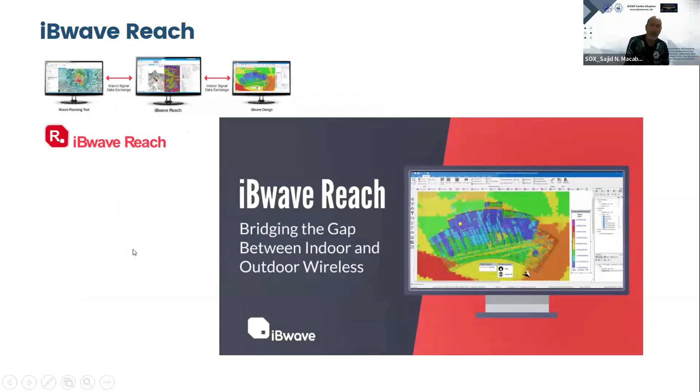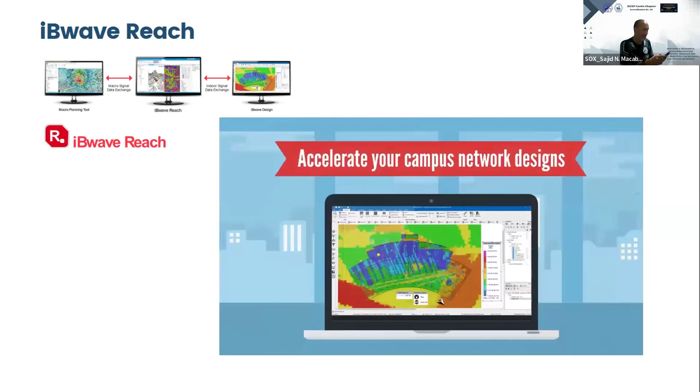Here's the problem: emerging technologies are here to design and deploy high-density private networks, but for campus environments, there's no way to do it efficiently and accurately. Companies like yours are forced to use two different solutions, one for indoor and one for outdoor, and with that comes challenges. Designing indoor and outdoor separately leads to poor prediction results, poor performance, and costly troubleshooting. Inaccurate predictions mean you often over-design and overspend on equipment. Large campus environments require multiple surveys, often leading to costly project delays. The time for an all-in-one planning and design solution for wireless campus networks is here. Meet iBwave Reach, our solution that bridges the gap between indoor and outdoor wireless design. Fully integrated with iBwave Design, iBwave Reach lets you import macro data from third-party sources for an end-to-end view of the indoor and outdoor network as you design campus environments. Here's what you'll gain: all those site walks? Gone. Now just do one site walk to validate network performance. You'll save hours, if not days. Inaccurate prediction and overspending on equipment? Also gone. With macro data considered for indoor predictions, have confidence the network you deploy will be reliable. With iBwave Reach, our customers are streamlining resources and workforce, shaving days off the project lifecycle, and realizing significant cost savings as a result. Accelerate the design and deployment of your wireless campus network designs with iBwave Reach, the only solution you can trust to seamlessly design indoor and outdoor networks with accuracy and precision.

That's bridging the gap. Napakaganda talaga, ang dami ng software tools na naglabas. You can optimize even the third-party contractor or designer. You combine, use this tool, then it will help you sa design mo sa indoor.